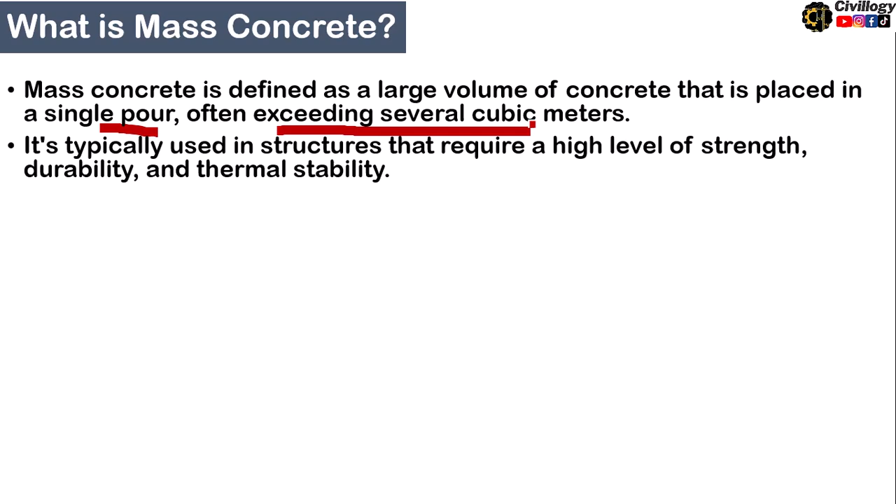It is typically used in structures that require a high level of strength, durability, and thermal stability. Mass concrete is typically defined by its volume, cement content, and heat of hydration.

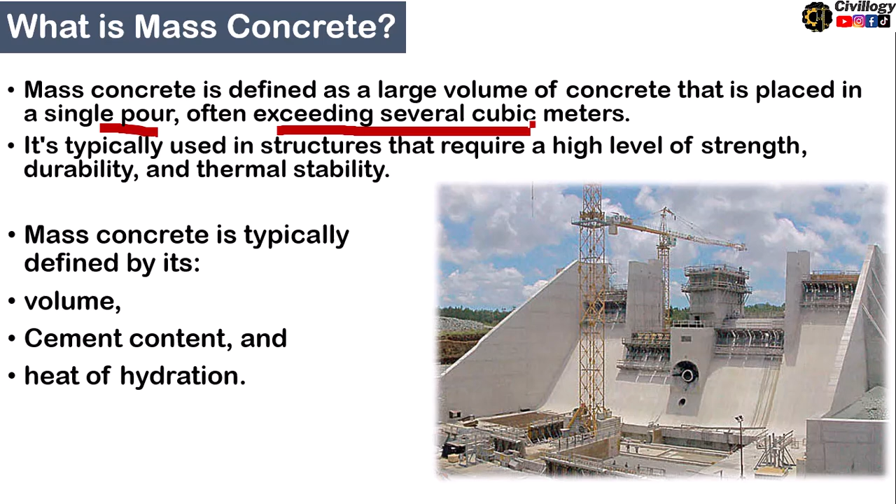Let us define it by volume. The American Concrete Institute (ACI) defines mass concrete as any volume of concrete with dimensions large enough to require that measures be taken to cope with generation of heat and attendant volume change to minimize cracking.

This means that mass concrete is that type of concrete which generates a large amount of heat, which is called heat of hydration. What is heat of hydration?

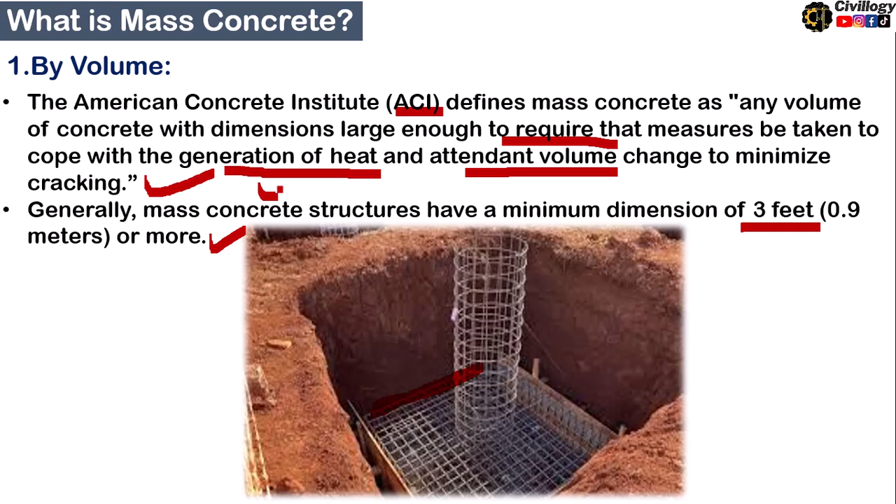Now, if we define mass concrete in terms of quantity of cement, it is defined as high cement content can lead to increased heat of hydration, which can cause thermal cracking.

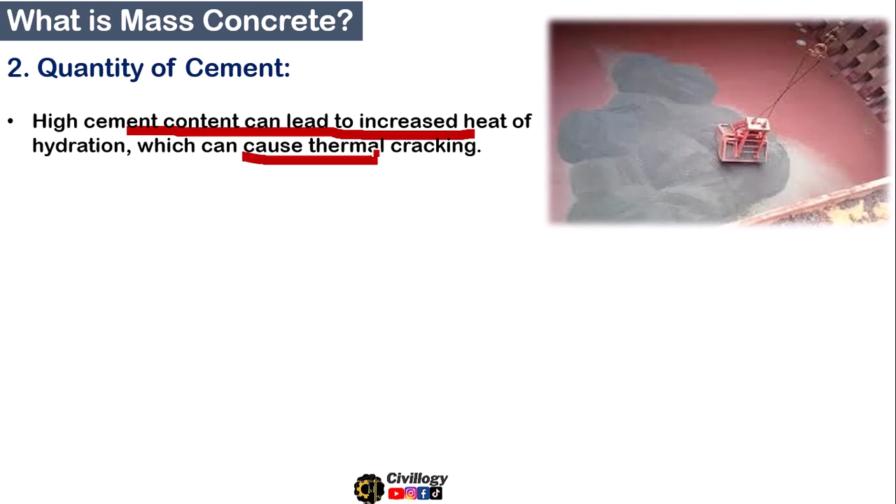Mass concrete often has a high cement content, typically exceeding 400 kgs per cubic meter or 25 lbs per cubic foot.

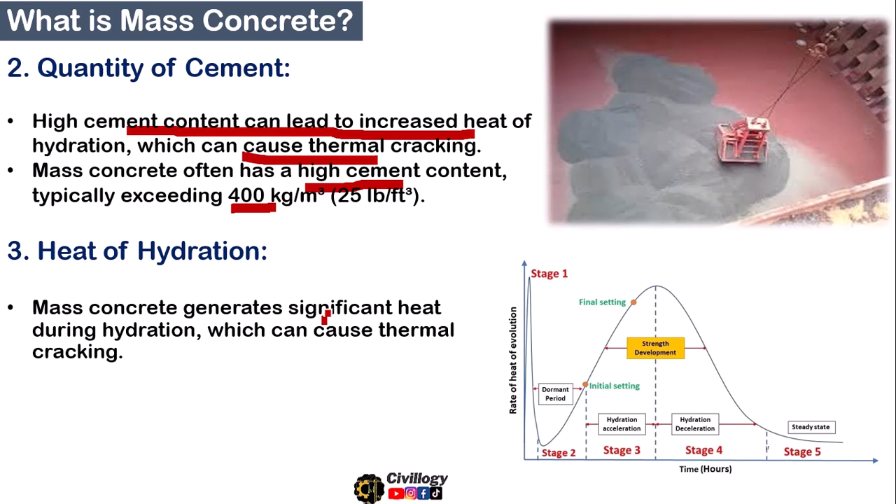If we define it in terms of heat of hydration, it states that mass concrete generates significant heat during hydration, which can cause thermal cracking.

The temperature rise in mass concrete can exceed 50 degrees centigrade or 90 Fahrenheit above ambient temperature. As you can see in this picture, this is the graph showing heat evolution for typical or normal concrete.

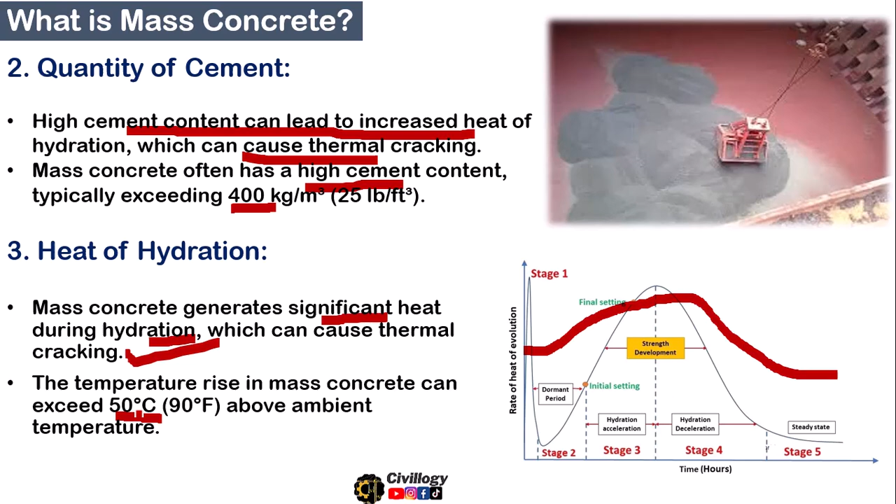But in the case of mass concrete, the heat of hydration graph goes somewhat like this. Such a type of concrete whose temperature rises above 50 degrees centigrade will be considered mass concrete.

Now there are some additional factors. By considering these factors, engineers can determine whether a concrete structure qualifies as mass concrete and take necessary measures to mitigate potential issues.

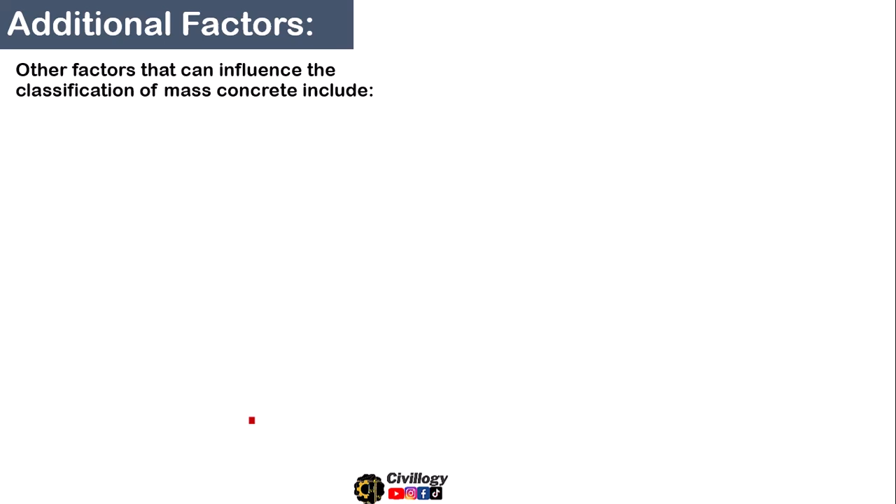Other factors that can influence the classification of mass concrete may include the type of cement used, aggregate size and type, ambient temperature, and cooling or heating measures employed.

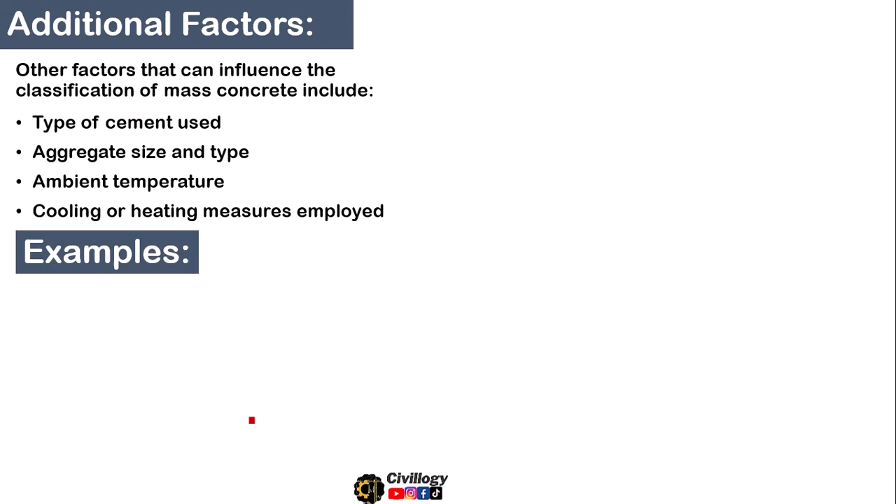Now, let us discuss the examples of mass concrete. The first one is dams. The second one is large foundations, bridge piers, and high-rise foundations.

As I defined in the start, mass concrete in terms of volume means that if the least dimension of any structure is greater than 3 feet, it will be considered as mass concrete.

And the structures you are seeing over here are exceptionally very large, so the concrete poured in these structures will automatically be considered as mass concrete.

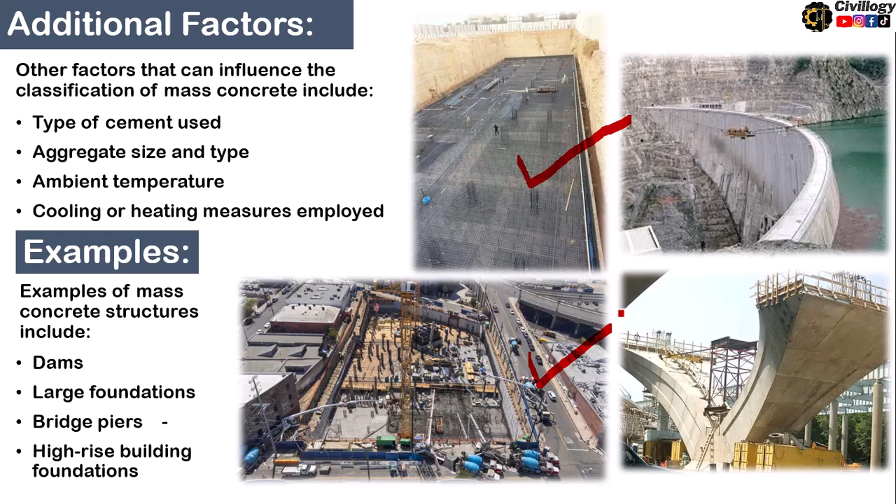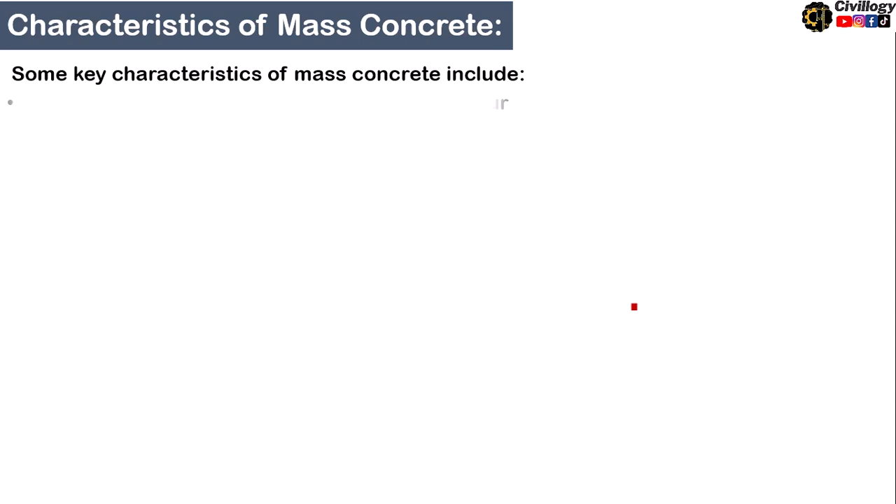Now let us discuss the characteristics of mass concrete. There are some key characteristics of mass concrete which may include a large volume of concrete placed in a single pour.

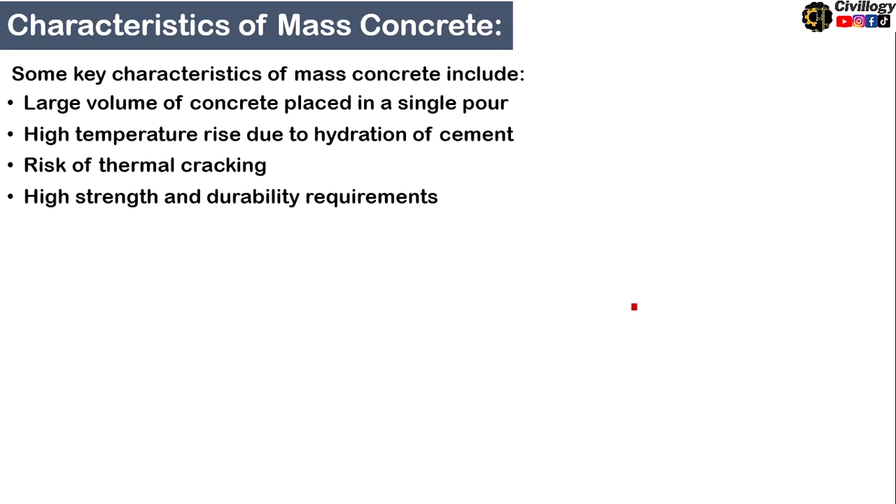High temperature rise due to hydration of cement, risk of thermal cracking, and high strength and durability requirements.

What are the challenges in mass concrete? Mass concrete poses several challenges, including thermal cracking. The high temperature rise during hydration can cause thermal cracking, which can compromise the structure's integrity.

The second challenge is temperature control. Controlling the temperature of mass concrete is crucial to prevent thermal cracking and ensure the structure's durability.

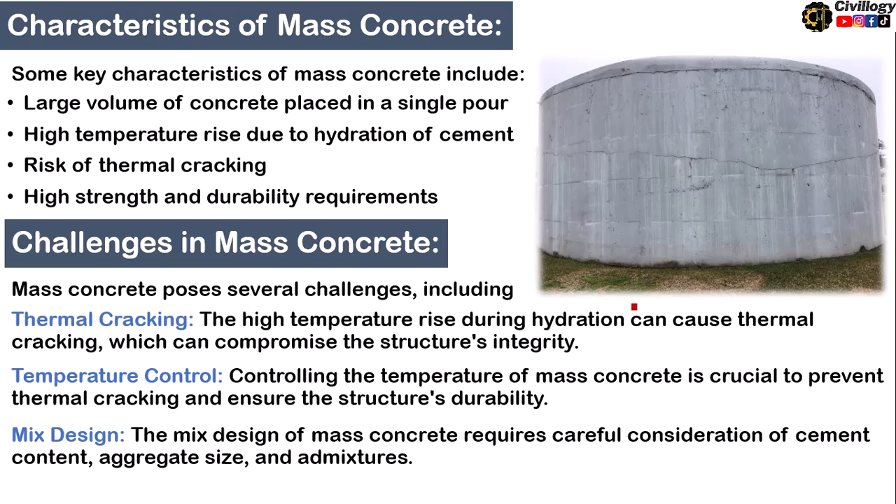The next challenge is mix design. The mix design of mass concrete requires careful consideration of cement content, aggregate size, and admixtures.

Now, let us discuss a few considerations which should be in your mind while designing a mix design for mass concrete. So, the first one is cement content.

Minimizing cement content can help reduce the temperature rise and risk of thermal cracking. The second consideration is aggregate size.

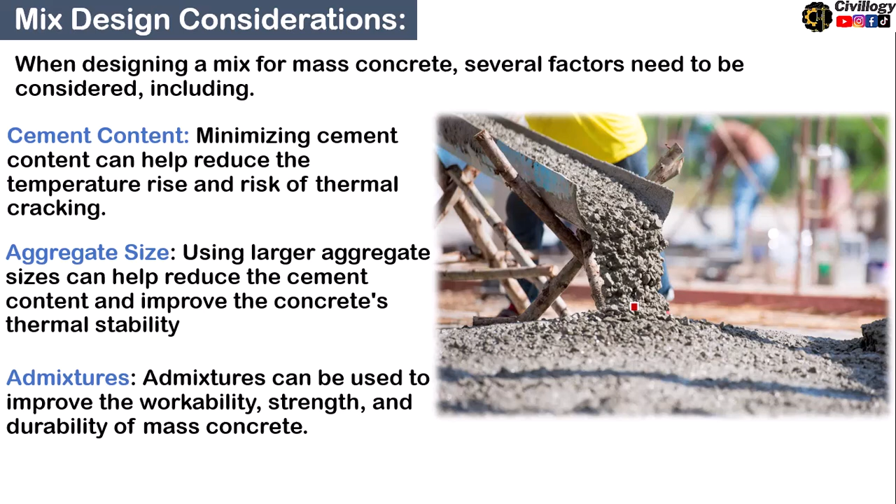Using larger aggregate sizes can help reduce the cement content and improve the concrete's thermal stability. The third consideration is admixtures. Admixtures can be used to improve the workability, strength, and durability of mass concrete.

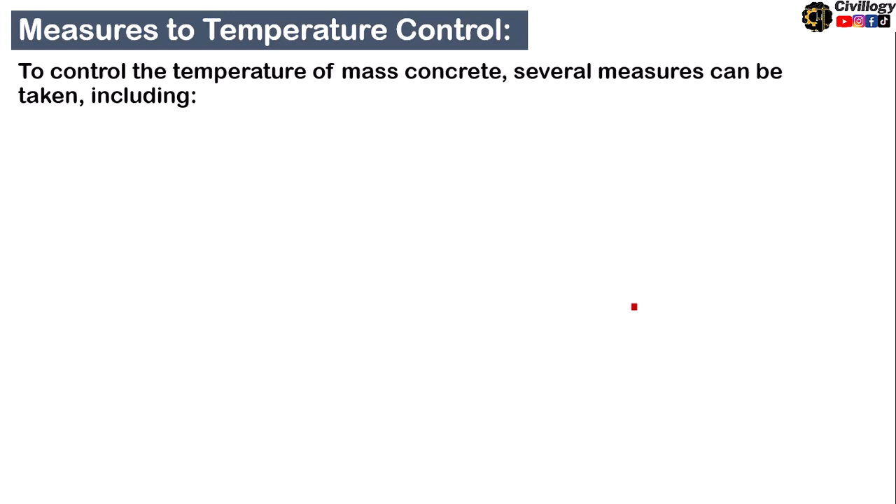The most challenging thing for mass concrete is to control temperature. To control the temperature of mass concrete, several measures can be taken, including pre-cooling. Pre-cooling the concrete ingredients can help reduce the temperature rise during hydration.

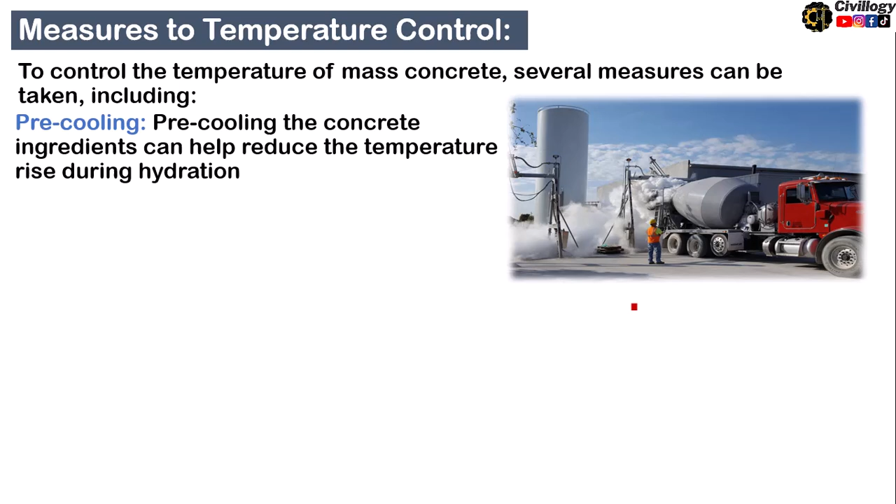There are a few methods which are used to pre-cool the ingredients of concrete like cement, aggregate and water, etc. Insulating is another measure - by insulating you can control the temperature. Insulating the concrete can help reduce the temperature gradient and risk of thermal cracking.

The third measure to control the temperature of mass concrete is proper curing, and proper curing is essential to ensure the concrete's durability and strength.

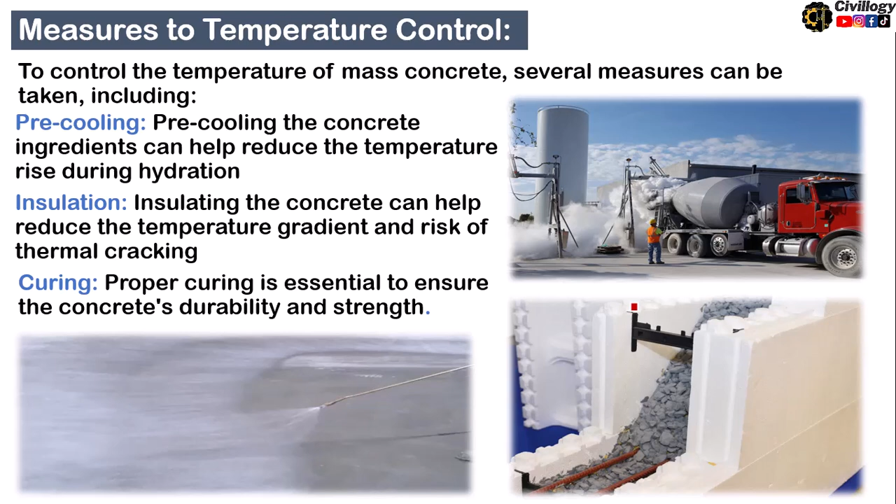Now, what are the best practices for mass concrete? Some best practices for working with mass concrete may include careful planning. Careful planning and design are essential to ensure the success of mass concrete projects.

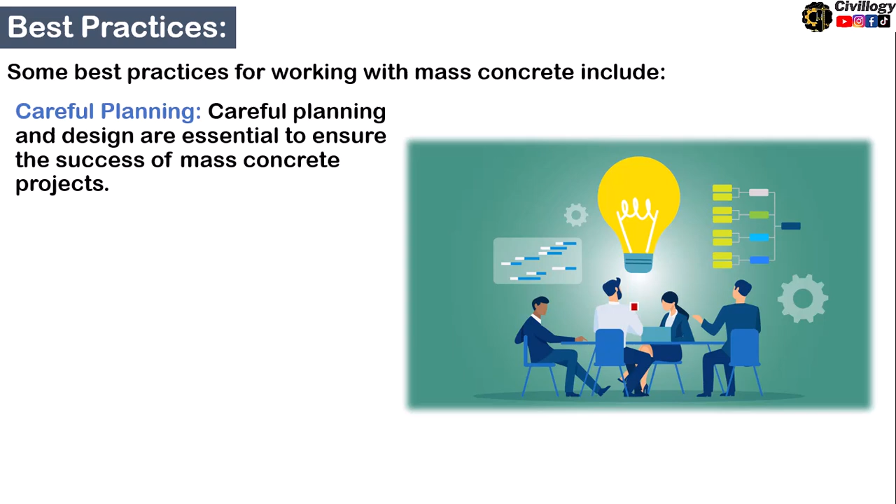The second best practice could be temperature monitoring. Monitoring the temperature of mass concrete is crucial to prevent thermal cracking and ensure the structure's durability.

Last but not the least, the best practice which can be adopted for mass concrete is quality control. Implementing strict quality control measures can help ensure the quality and durability of mass concrete.